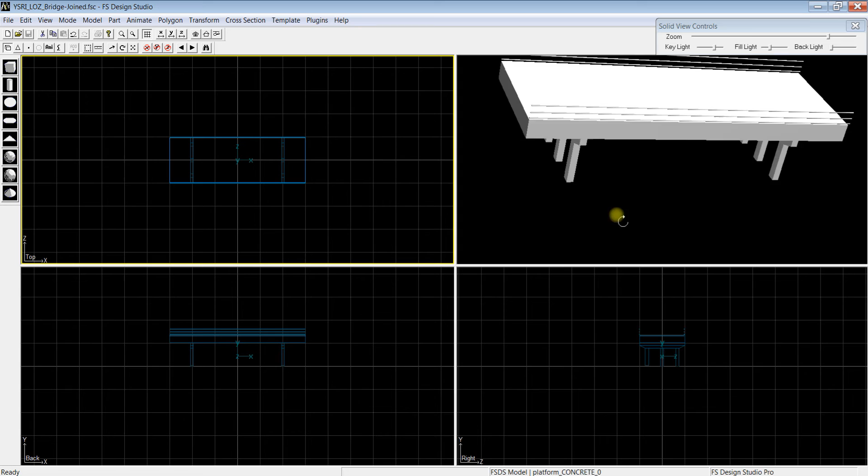Now you complete your model. I'll just bring this down so you can see it. You complete your model — this is just a bridge, obviously. You complete your model, then you snap it and join it. Make sure it's complete. It's ready to go, ready for export.

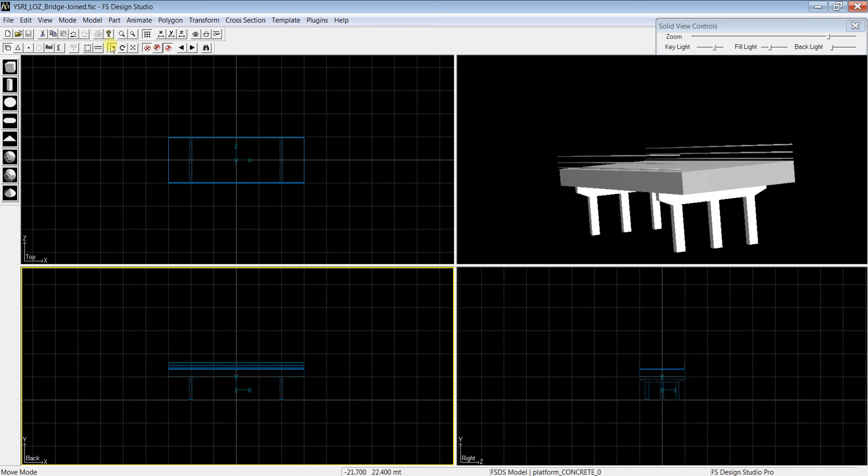When you've done that, you then make a new poly, just a square one. I've got it actually here. Let's do this again, and you make a platform. Now you can see there's the platform — it's visible quite clearly, visible there.

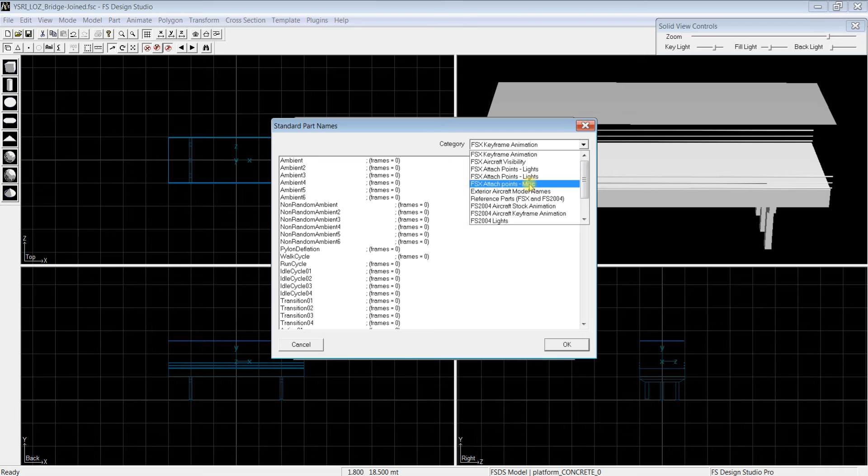Now that one there, you then go into the current part properties of that, and from the list you find your heading. So there's my miscellaneous, Flight Sim X Attach Points Miscellaneous, which comes from your partnames text file, and you can see there's my list called concrete, and you hit that. You don't have to actually give it a parent name if you don't want to, and then you give it that.

Now you want that to be just below the surface of your model, so zoom in as much as you can, go down to where the surface is — there's the surface. This one here is the surface, and then you bring it down to just below the surface, and I'm zoomed right in.

Here we go. So there's the upper surface, there's the lower surface. You put it there, as close as you can, so the wheel doesn't look like it's going through the item you're making. You could be doing this for a boat. That's actually the wrong one, it's that one there.

So you make that very close like that, and you don't snap it. If you snap it, it'll become part of the model and it won't work. So you don't snap it. You make sure that your axis is at ground level, or wherever the ground level of the model is.

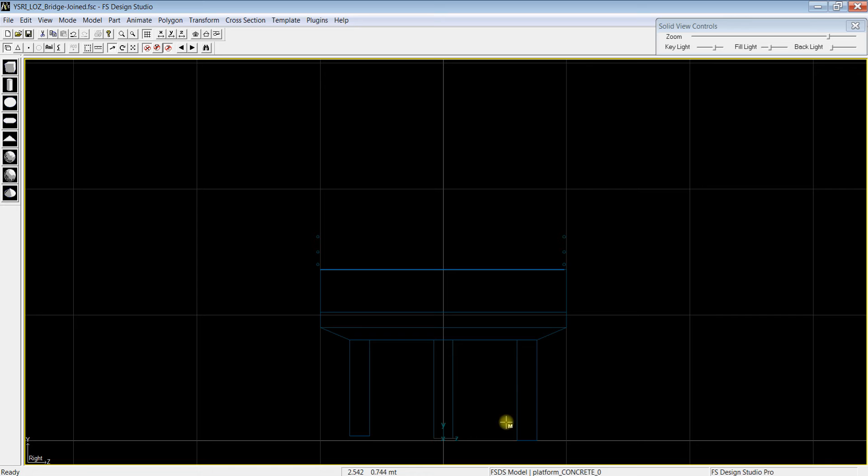You can see I've got the model slightly off ground level here. So you bring the axis down, and then you bring your model down as well to match it up. So that's going to be ground level, and there you have it.

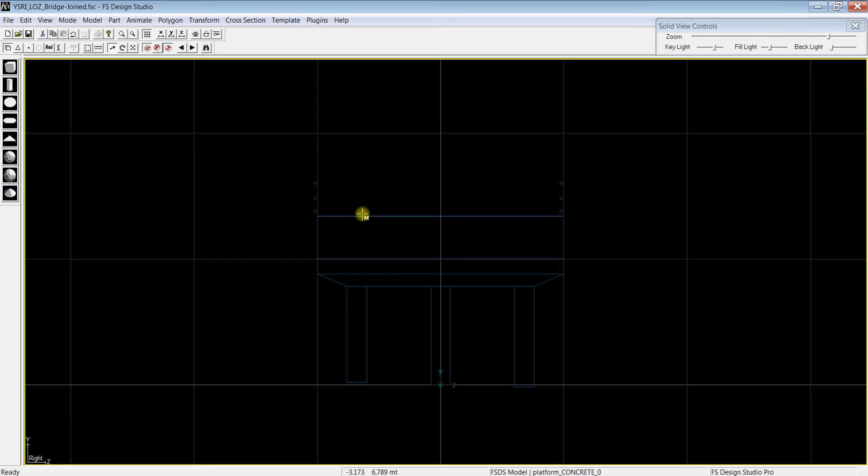So now you've got your model, which is snapped and joined, and you've got your road surface here, which you can land on and you can drive over, and you can do whatever you like as the person who's in Flight Simulator.

And you can see I haven't quite got these at ground level. I usually put them slightly below anyway. So there you have it — there's your model and there's your hard surface.

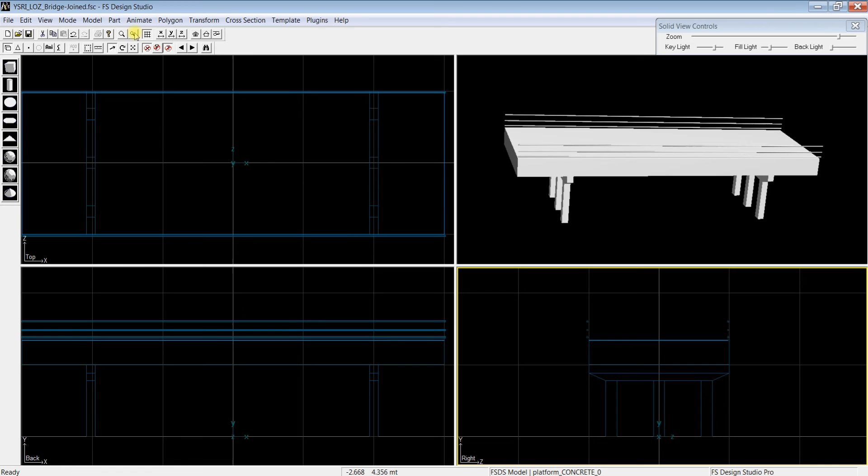So the hard surface won't be visible inside Flight Simulator. It'll only be your model with the textures of your model, and the hard surface being slightly below the surface will allow you to land on it.

So now you can drive a car over it, you can drive a plane over it, you can land a helicopter on it. It's handy if you want to make a building with a helipad on it that's up a few stories. You can build an aircraft carrier so you can land the planes on it. There's a lot of applications you can use this for.

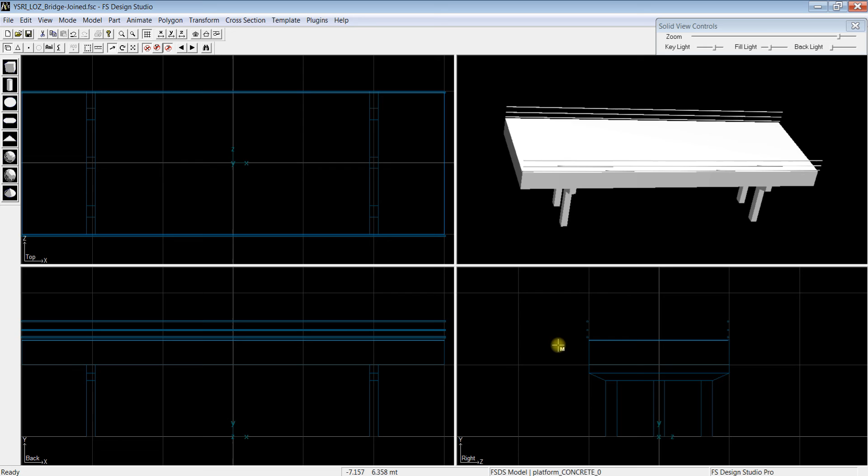Once you've done this, your model's already been snapped and joined, your hard surface has been added, and then you just compile it like you would any other model, but you don't join this to the hard surface. So you just compile it, call it bridge, there's bridge there, and then hit save, yes, that's it, compile it, and that's it. And then you'd have it textured.

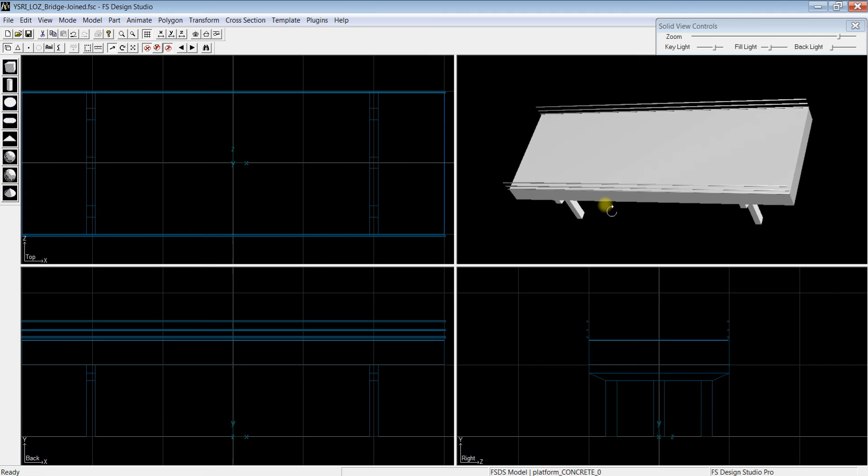The textures aren't available at the moment, but I suppose I could put the textures in there. We won't worry about the textures, but you get the idea. So it's below the surface — it's not visible because it's below the surface.

If you wanted to, with an aircraft carrier say, you could have the whole upper deck where the aircraft takes off and lands be the hard surface, and then put the texture on the hard surface rather than being semi below it. Okay, so that's basically how you do a hard surface.